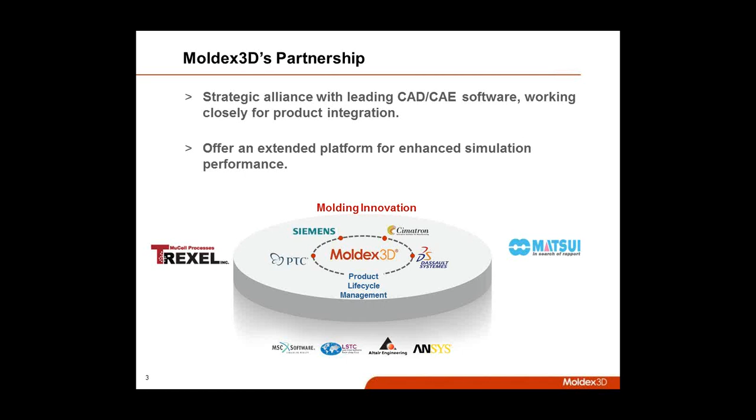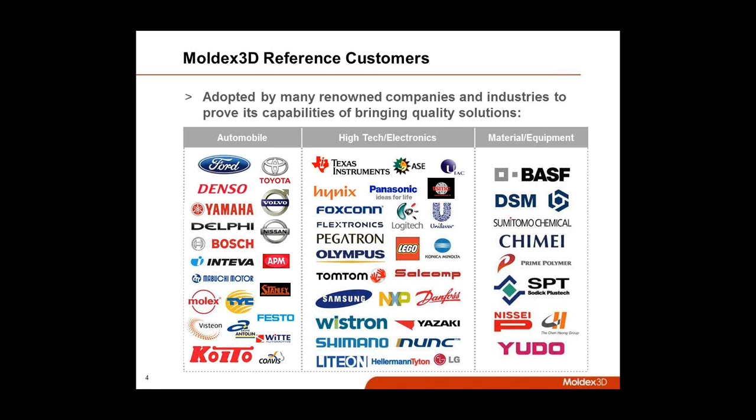Here's just a handful of our reference customers who are already using our software. This is across the world. Again, we've been used in every industry from automobile to aerospace. We do a lot of really great work with different optics companies, material companies. So again, if there's an industry in which plastic is involved, Moldex3D has been a part of it. We've been in North America for about 4 years or so, but already at this point we have a lot of pretty good customer references. So here's just a handful of them right here.

Educational accounts are also very important to us. We just got partnered up with the University of Akron last year, so they're using our software in a lot of their different graduate programs. But we work closely with Ohio State University and UMass Lowell. We actually have a lab at UMass Lowell where we do a lot of trainings. Our software has been used in research projects from Purdue to Wisconsin. University of Alberta has a lot of seats of our eDesign software, and a lot of other smaller engineering colleges across North America and throughout the world have been using our software. So getting our software in the hands of different educational accounts and working with grad students on their research projects is very important to us.

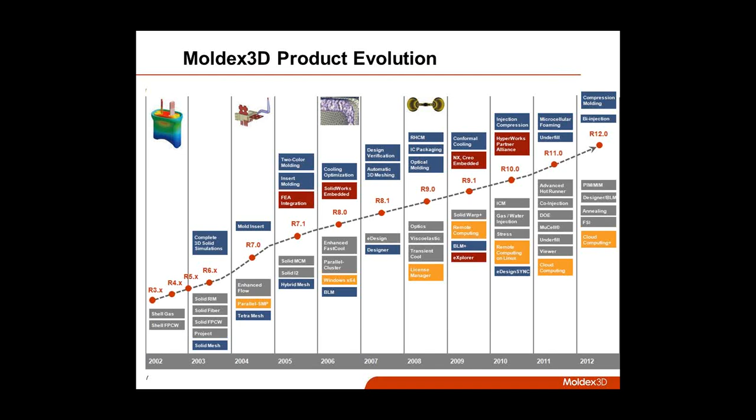This slide goes through the evolution of the Moldex3D commercial software. Commercially, we've been available since 2002. We're on our R12 version. Our R13 version should be coming out sometime in the spring, so there will be a lot of new stuff probably around March. With our R12 software, we were able to start doing things like compression molding and bi-injection molding. We were able to speed up our processing capabilities so that we can get results a whole heck of a lot faster. One of the things not listed here is we made a pretty large investment into material characterization, so we can now test our own materials, which has been really nice for a lot of our customers thus far. So we're always looking towards where the plastic industry is going, and how Moldex3D can be a part of it. The yearly software updates are one of the things we like to hang our hats on.

Just real quickly to go through our product portfolio and what we have available. Moldex3D is injection molding software. Our eDesign and eDesign Basic packages are where the injection molding software comes into play. eDesign Basic is basically just a filling analysis. Our eDesign Suite, this orange box here, is our full analysis capabilities: filling, packing, cooling, warpage, as well as insert molding. We can also look at fiber orientation in there, and those results can be taken into different FEA interfaces for material properties. So there's a lot of cool stuff that can be done. It's all automatic mesh. It's all 3D. And this is also fully integrated into the PTC Creo software, so it's pretty nice for any injection molders.

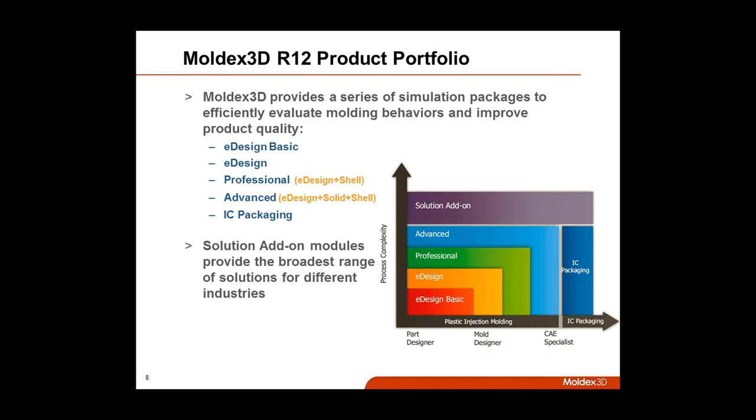Moldex3D also gives users the ability to use different types of advanced meshing software to do more advanced simulations, such as compression molding, optics analysis, or MuCell simulations. So really, whatever process our customer is looking for, Moldex3D can try to put together a product portfolio that would work for you.

So I guess getting into the meat and potatoes of how it is Moldex3D can help. Obviously, for a filling simulation, we can do a really good job of looking at weld lines and where particular knit lines are coming together for the aesthetics. We can look for air traps, making sure balanced flow is where the part needs to be.

We can look at a full warpage analysis, so if there's any particular areas that might be of concern, we can isolate that before, say, a cooling line is changed or packing pressure gets changed to try to adjust for warpage. And again, as I alluded to earlier, we can do full fiber orientation prediction. So if you're working with, say, a glass-filled polypropylene, we can show you exactly what those long fibers or short fibers are doing during the filling, packing and cooling stages.

We can help to try to keep our customers more competitive, and what we mean by that is through simulation capabilities, we can make sure that your cycle time is reduced. So basically, your parts are coming out of the mold as quickly as possible so that you can produce as many as possible.

Also, Moldex3D is pretty cool in that we have a lot of different communication tools. Basically what that means is when an analysis gets done, the software will automatically create PowerPoints for you to show you what's going on during a filling analysis or packing or whatever it is you need to look at. In our R12 software, there was actually a nice feature that came out. We have what we call our 3D PDFs. So you can actually create a 3D PDF so that your part can be moved and changed and rotated in there, along with all the useful information. So it's really nice for communicating across different departments.

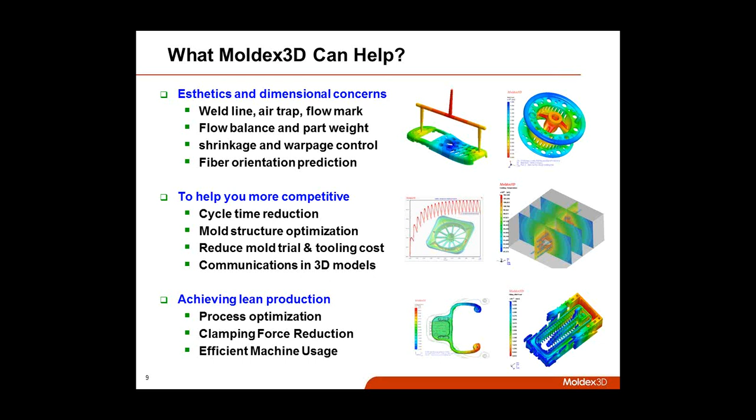And achieving lean production, again, it's just through simulation you have the ability to look at, is my clamping force where it needs to be? Am I using the right machine in order to get this part created? Just again, trying to make sure that everything is being done in order to make sure that your part is being created and manufactured in the most effective way.

We have a large material data bank. With our R13 software, I think we will be over 7,000 different materials in there. But again, we also do material characterization, so it really doesn't matter what material you're working with. We can run a simulation with it. Again, fully integrated in lots of CAD and FEA interfaces. We can do parallel processing, which is the process of hooking up different computers to one another to get results a whole heck of a lot faster.

And we have lots of different pricing options, everything from a pay-per-use model on up to buying a full license to leasing models. So I know it sounds kind of cheesy, but one of the things that we like to say is we want to compete on technology, not on price. So again, lots of different options for our customers.

Differentiating features: full 3D, that's including our runner lines and cooling lines, the widest range of add-on solutions, which are those more advanced simulation capabilities, and yearly software updates. CAD doesn't have to be perfect. The software will clean that up for you if there are a couple lines that may be off or may not be connected. That's okay. Fully integrated in a lot of different CAD softwares, as I mentioned before. Our parallel processing capabilities are second to none.

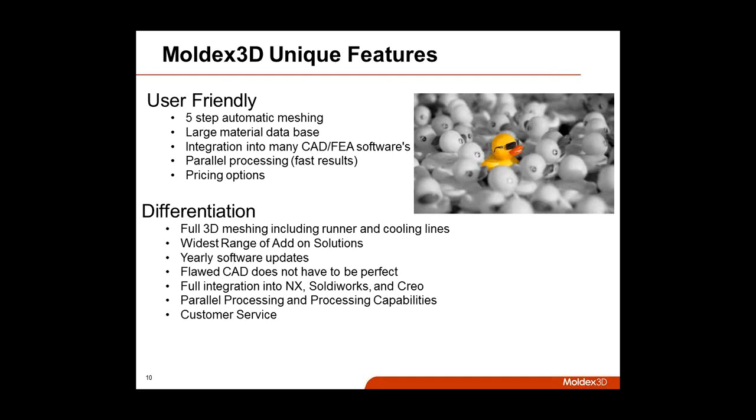And here in our Farmington Hills office, we have a full staff of engineers. So in the event that a customer has a question, you run an analysis and it's looking kind of weird, you don't really understand it, or you're running into some issues, call us. We're here to help. Again, we have a full staff here who's dedicated to making sure our customers are taken care of.

So next, I'll get into the standard analysis functions of Moldex3D.

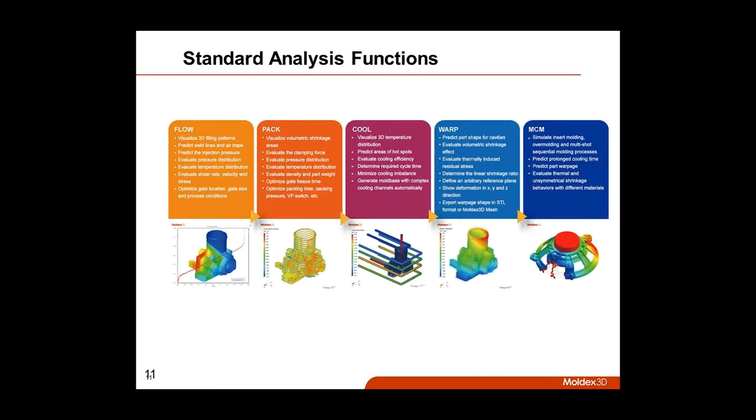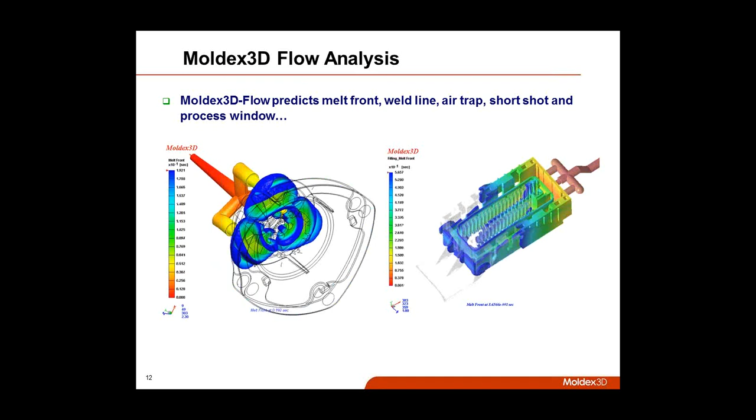Kind of what you get out of the eDesign software. We can do full filling analysis. And again, this is all automatic mesh for you. It's all 3D. So it's really good at predicting, obviously, where weld lines are going to come together, but also short shots, air traps. If you're doing a multi-cavity mold, it's really good for balanced filling.

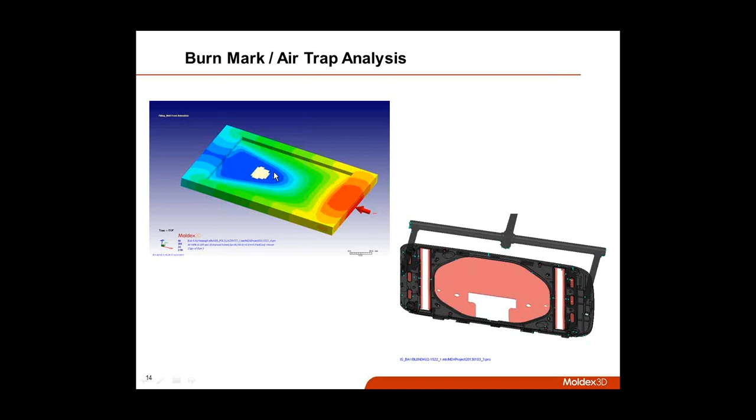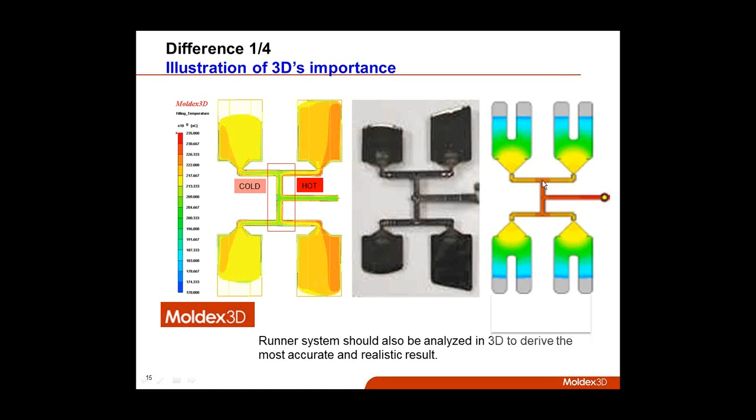It's called shear heating. So if you can imagine material flowing around this runner layout, it heats up, it cools down, the material properties are changing. And in turn, it kind of throws off filling a little bit. If you have a 2.5D runner layout, it doesn't really pick up on that very well with these multi-cavity molds, whereas Moldex3D does pretty well.

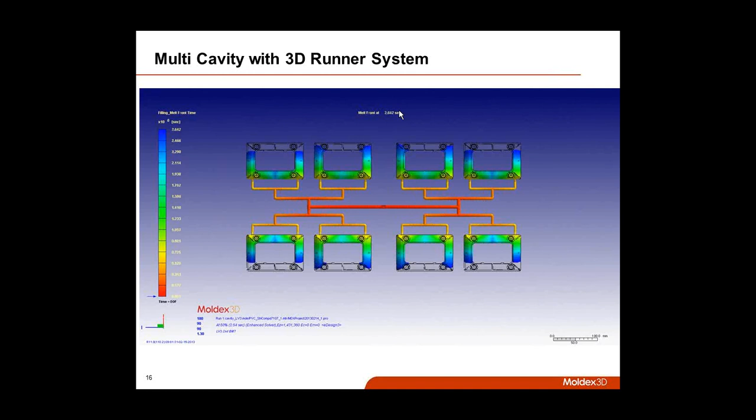And this is just an example of an actual customer that we had. These are fence posts, the top of fence posts. And as you can see, the runner layout looks balanced, but the filling, not quite. We were able to pick up on that because of the 3D runner layout.

And here's just the real-life example of what the customer was having. So we were able to predict this. And because we were able to predict this, the customer was able to just go ahead and modify the runner layout and able to produce some pretty nice fence posts.

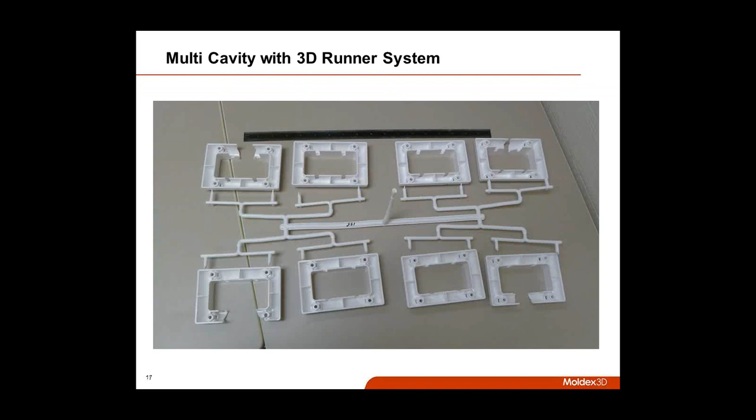Getting back into it, we can do a full packing analysis. We just make sure your part's not underpacked or overpacked. We can do full cooling analysis, so we can look at your part and say, okay, well, you may have a hot spot in this area. You may want to put a baffle in there to kind of reduce that.

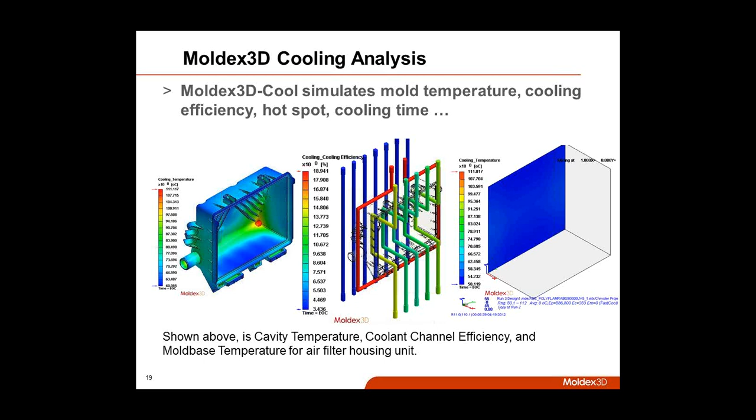And we have a full feature called our slicing option, so you can actually cut through, say, a thick part and look at the temperature in the center of the part versus, say, the outer skin of the part. Just kind of let you know, hey, there might be some areas for potential sink marks, or your part might not be cooling properly, and here's why.

Full warpage analysis, again, looking at volumetric shrinkage of your part, exactly what it's going to do while cooling. We can look at this on a full X, Y, and Z displacement.

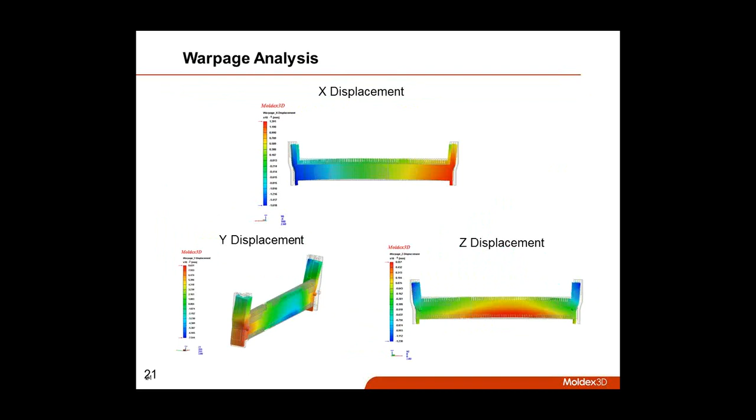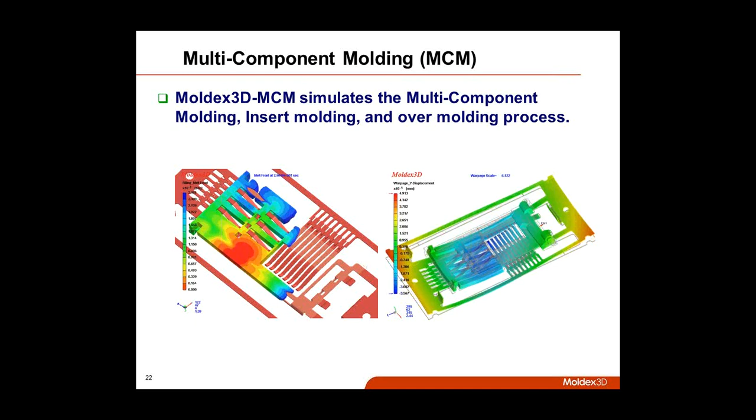We can also do insert molding. So if you're working with, say, a metal insert or a copper insert or another plastic part, that's cool. We can model that into the simulation and show you exactly what filling is going to look like, warpage, all that good stuff. So insert molding is cool.

Just kind of going into a little bit of our advanced features and what Moldex3D offers. Again, this is kind of the more advanced meshing packages. Excuse me. Moldex3D can do everything from powder injection molding, gas assist, water assist. We can do the encapsulation process for IC packaging.

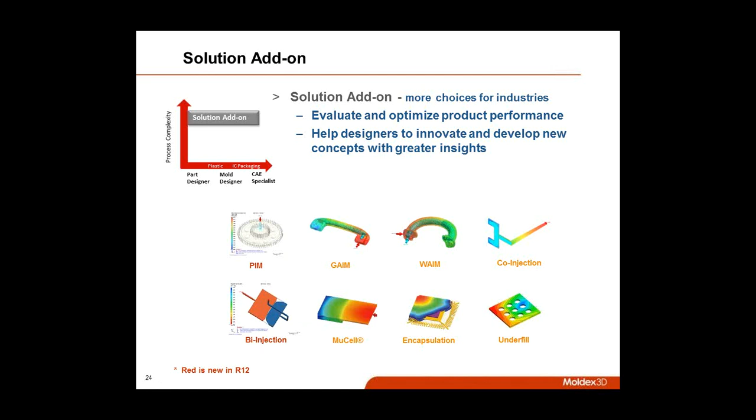Again, being here in the Metro Detroit area, we're working really closely with a lot of automotive suppliers. And one of their big things is trying to get weight down in their parts. So the MuCell simulation is becoming more and more popular around here. It's the process of injecting nitrogen into a part in order to reduce warp and get weight down. So that's becoming more and more popular with Moldex3D.

We can do full fiber orientation. Compression molding is, again, one of those things that we're seeing more and more of the industry, at least around here in the Metro Detroit area, doing more of.

One of the big things we can do is optics analysis. Our meshing capabilities are really good, so we can get a detailed idea of what's going on inside an optics part. We can look at birefringence, making sure light refraction is where it needs to be. We can also do hot runner analyses and look at moldbase temperature, which is really important in hot runner analysis.

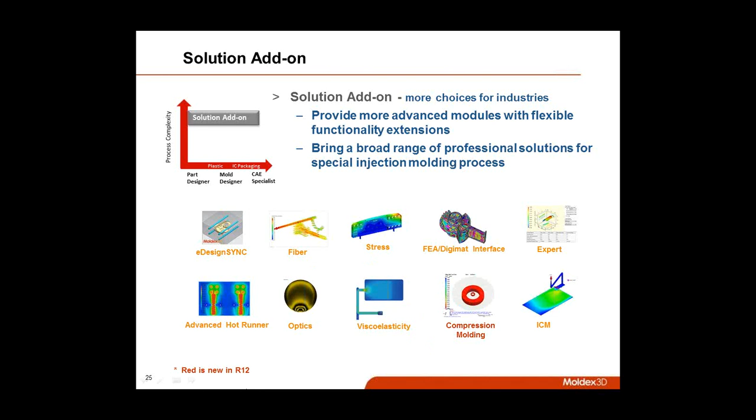One of the things that really makes us good is our ability to use different types of mesh elements. Here's just a handful of them. Different mesh elements are really good for different types of applications.

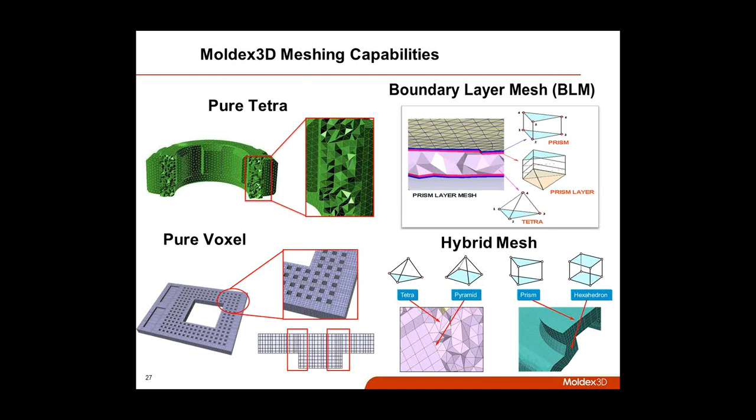Our eDesign software for injection molding uses what we call our voxel mesh, kind of like the squared-off mesh here, which is really good for injection molding. But if you're doing something like optics analysis, we work really well with different hybrid meshes. Compression molding works really well with boundary layer meshes, but we also have the capability of using pure tetra. So it really goes back to what kind of simulation you're looking to do, and how we match up the best meshing capabilities to get the best results for you.

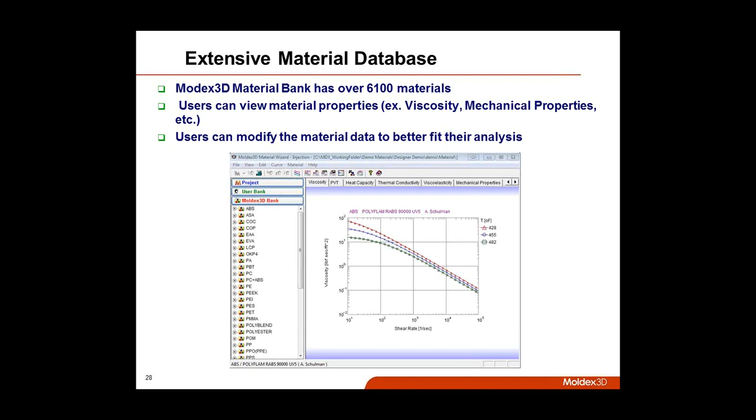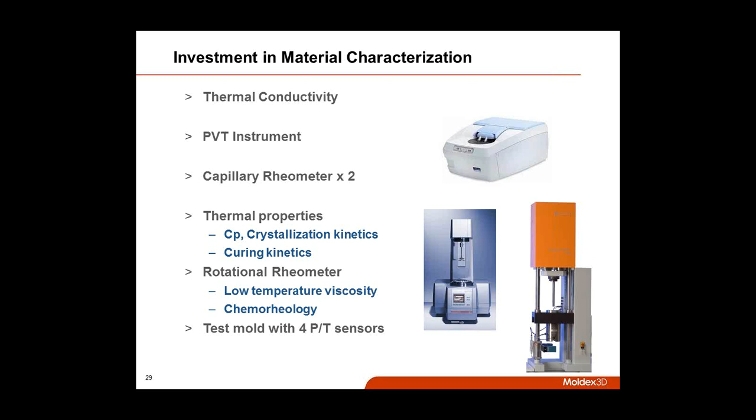This slide's a little old, my apologies - we have closer to 7,000 different materials in our data bank today. Our data bank is arranged with a lot of different materials, and if you purchase Moldex3D, you have access to all of them. In the event you need material characterized, we can do that for you too. I know this is becoming a larger part of our business, so headquarters back in Taiwan keeps investing more into material characterization. If you're looking for thermal properties or viscoelastic properties, there's a lot of good stuff we can test for and take into account in your simulations.

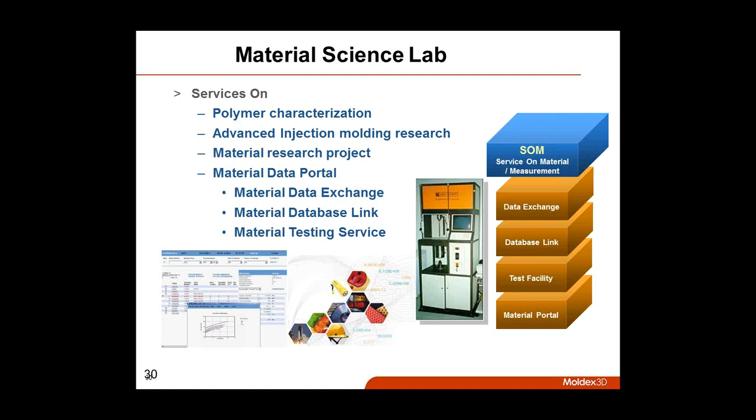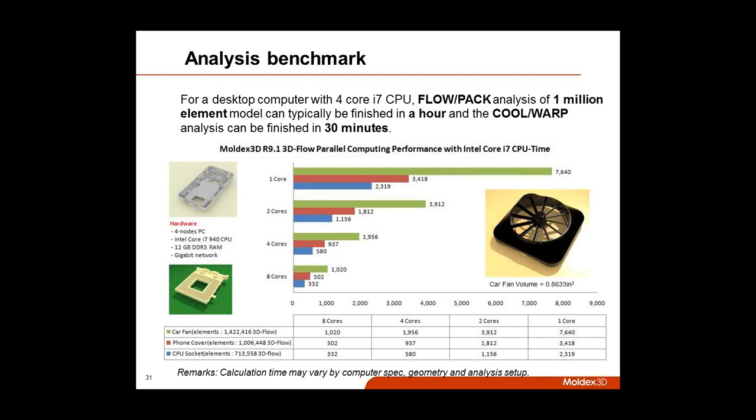This slide illustrates our capability to do parallel processing, which is basically taking different computer towers and hooking them up to run analysis a lot quicker. We pair up 4 different CPU towers here in our office for any work we have to do, so we're working off about 16 cores of computer processing, which gets things done a whole lot quicker than if you're working on just 4 or 8.

We also have the ability to do remote computing. We have floating licenses, so if you want to house the license on a particular server and check it in and out, you can do that. If you wanted to use TeamViewer or remote into a particular tower to run your analysis, you can do that too. This emphasizes that you're not limited to a particular workstation or computer - Moldex3D can work for larger organizations or just one person.

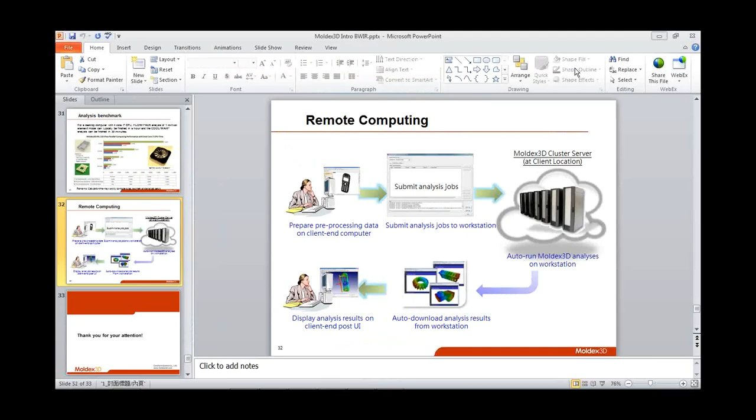That being said, I'll go ahead and show you a quick video. Let me bring this up. This is Moldex3D integrated into the PTC Creo CAD software. Basically, you're working on your part inside the CAD, you click this little Moldex3D button, and it automatically takes you into the Moldex3D interface. This video goes really quick, but I'll stop and start to show you what's going on.

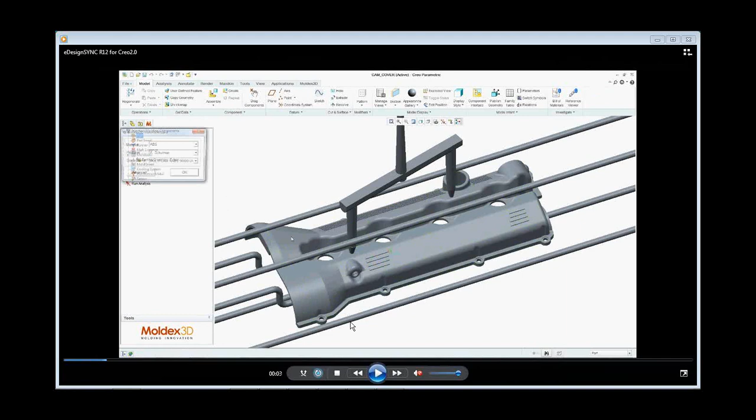As you can see here, you have your cooling lines modeled in, the runner layout, and your part. We're going through and isolating what is what inside this analysis - isolating this as my part, the type of material we're using, and next we isolate our runner and our melt entrance point here.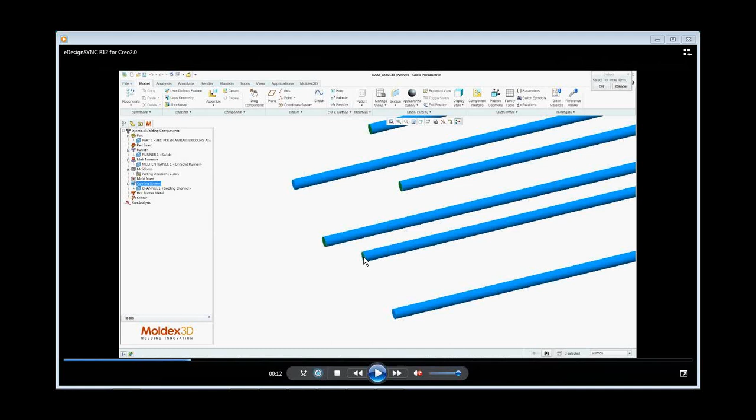Next step would be to isolate our cooling lines - these blue lines here. My apologies for going so quick, but they've isolated these as our cooling lines. Same as with the melt entrance point, we're isolating the areas where cooling material will be flowing into our cooling lines, as well as where it will be flowing out.

Next step is we automatically generate our mold base. We have in our software what's called our wizard functions, which will automatically generate mold bases, cooling lines, or runner layouts for you. In the event you already have these, you can just import them or sketch them inside of the software.

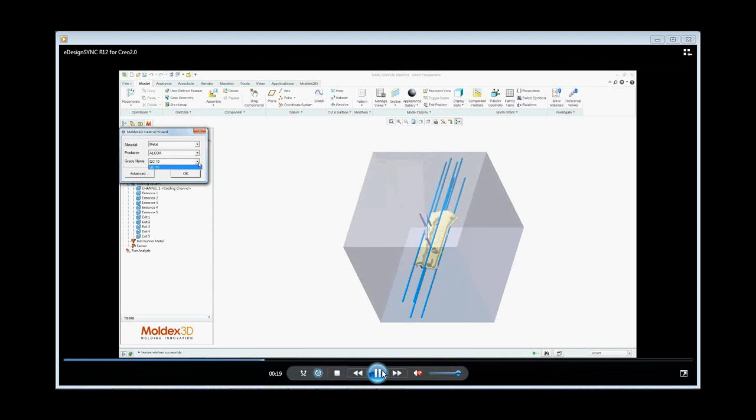So we have isolated our mold base, the type of mold base block that we're using.

Next step here, we're setting the sequence that we want. So we're doing a full analysis, setting that up. This is the different mesh level, so you can set how intricate you want your mesh to be when creating the automatically generated mesh. If you want a real detailed analysis, you could set it at level 5. If you just needed a quick filling analysis and don't need a real high element count, you could set it at level 2. Obviously, the higher the element count, the longer it's going to take for a simulation to run. So it's really up to the user and what they'd like to accomplish.

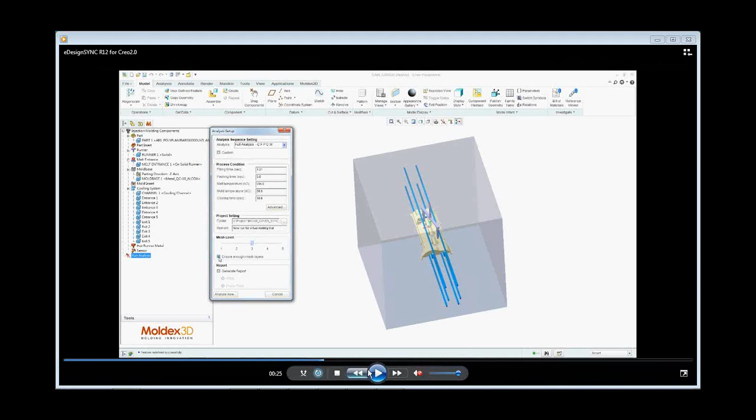But we created a solid mesh. Once a solid mesh is created, you have the ability to look at a full analysis. As we can see here, this is a filling analysis. We can look for the temperature distribution, and this is kind of looking at an isosurface distribution, temperature on the inside versus temperature on the outside here.

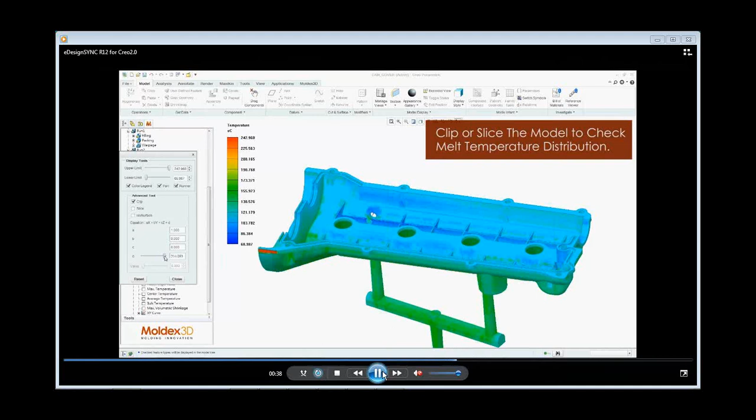That being said, I'll just go ahead and bring up and show you guys. This is the Moldex3D interface after a project has been run. This is the standalone license, but I just wanted to give you guys an idea of some of the things you can see in here.

I already have this part, I've got a part insert in here. I set up my parameters, my processing conditions. I've got an ABS plastic material in here that's fiber filled. I've got a little metal insert in here. So we can do a full filling analysis.

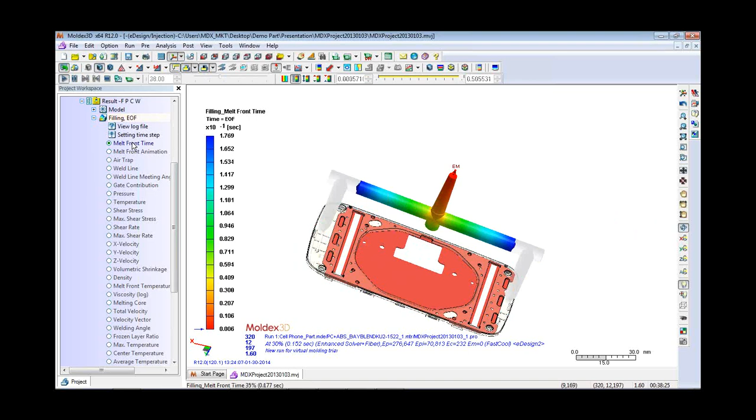You can speed this up, slow this down, however you'd like to. I'll pause this. If you want to look for potential air traps, just areas — these little blue dots you can see in here are potential areas you'd want to be aware of in the event you want to put a little bit more venting in.

If you want to look at pressure distribution of your part, as you can imagine, there's probably a lot more pressure that builds up in the runner versus the part. And these are all during filling. If you want to look at pressure distribution at, say, the end of packing, you could do that here.

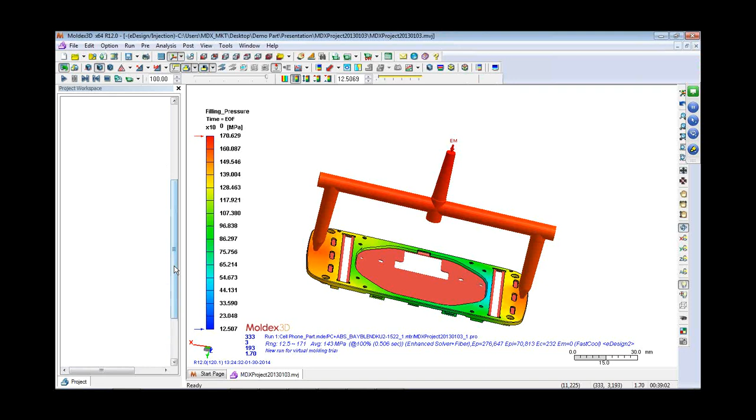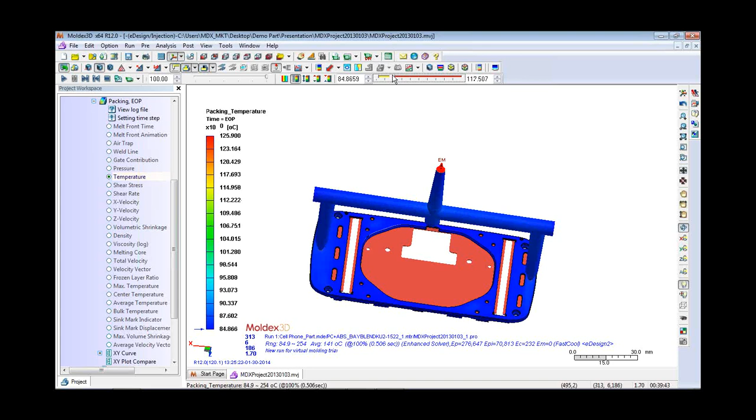If you want to look at gate contribution, just making sure everything's pretty balanced, temperature, do all that good stuff here. Obviously, you can set the range that you want here for temperature. If you want to bring this down, you can do that all here.

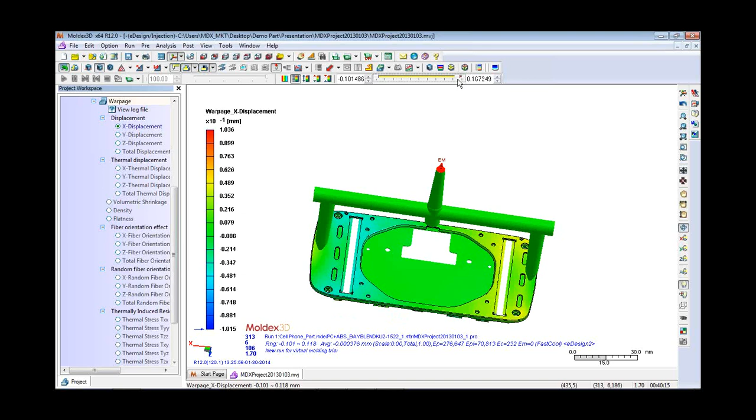When I looked at fiber orientation effect, the amount of displacement caused by fiber orientation — as you can see around the gates, fiber is kind of filling out here and bumping into this wall, so it's probably building up and going in a lot of different directions. That looks probably about right. Again, you can look at it along whatever axis you want. Random fiber orientation effect. Let me show you guys cooling really quick.

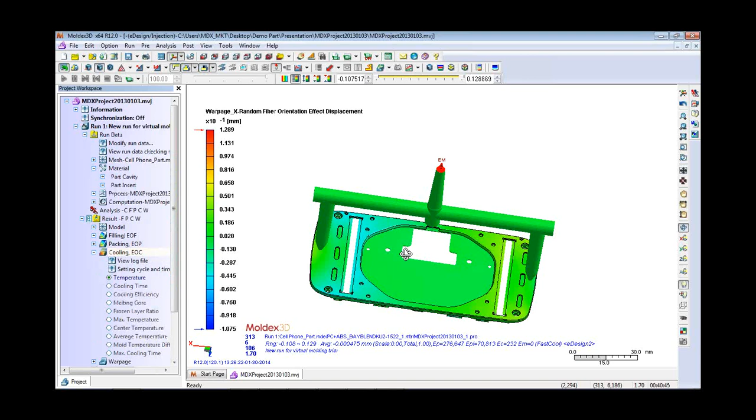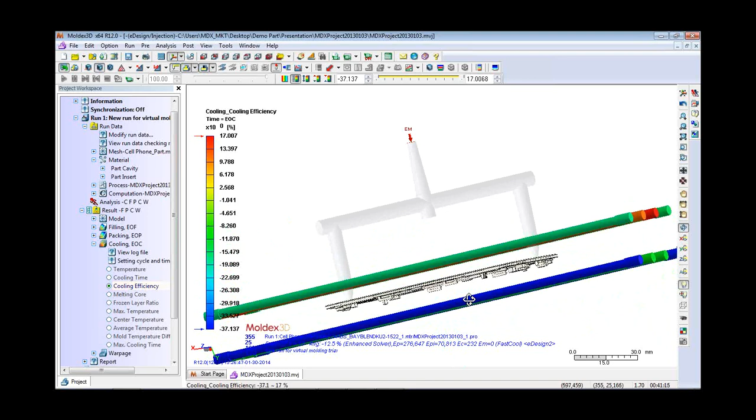And again, you can look at cooling efficiency. These are a couple of cooling lines that I had in here. As you can see, these blue lines probably aren't working too efficiently, whereas the green lines are. These are just real arbitrary lines that I put in. Again, if you had a more complex cooling layout, you want to see how it's working, you could draw that in there, or you could import it in and then just isolate this as my cooling line in the software, and then it'll run that in the analysis.

But red lines are working really good, really efficiently. Same with orange and green, whereas blue not so much. So I may be able to tool out those blue lines.

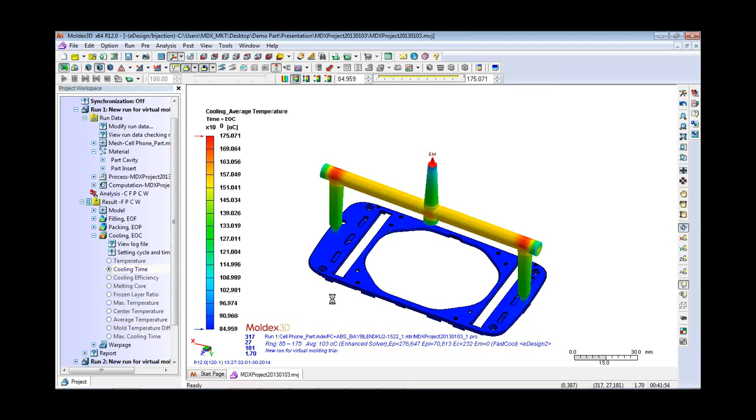We can look at average temperature of the part, just kind of getting a feeling for what the average temperature in the runner is, the part. Again, there's pretty big temperature distribution between the part and the runner layout, so we can just change the settings here. Let's see, cooling time. You can set this in your processing conditions, which is why I've got it set so high. But again, you can change all that good stuff when you're actually setting up the analysis. So I just kind of want to show you guys all this good stuff.

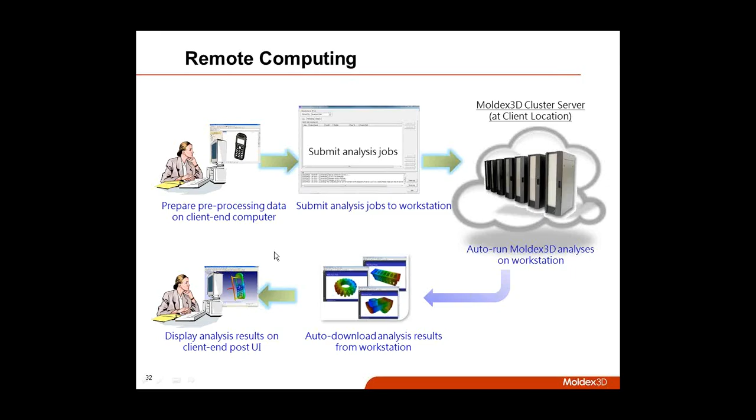How does packaging work? What do you do? What do you need to purchase? What comes as part of a standard package? Add-ons?

Okay, well I guess just to start with, our very basic was the e-design package that I showed you guys earlier, which is just that standard filling analysis. But in the event that you needed, say, packing added on, or you needed cooling added on, we can go ahead and create add-on packages for you. So really it's kind of trying to understand what the customer needs and then building an actual Moldex3D license for you out of that. But it starts with filling analysis.

In the event that you wanted the full-blown, the whole deal, that would be the e-design suite, which is filling, packing, cooling, and warpage analysis. But again, kind of starts out at e-design basic, and then depending on what it is the customer needs, we can just build on top of that e-design basic package.

Okay, now do you guys do anything with metal injection molding, or plan to in the future? I've been asked that question a lot, and I wish we would, because it comes up a lot. But unfortunately, to the best of my knowledge, no, not right now. I mean, we do powder injection molding, which kind of deals a little bit with metal injection. It's got little metal flakes in there that are mixed in. But as far as working with metal and doing simulations with that, we're a little far away from that.